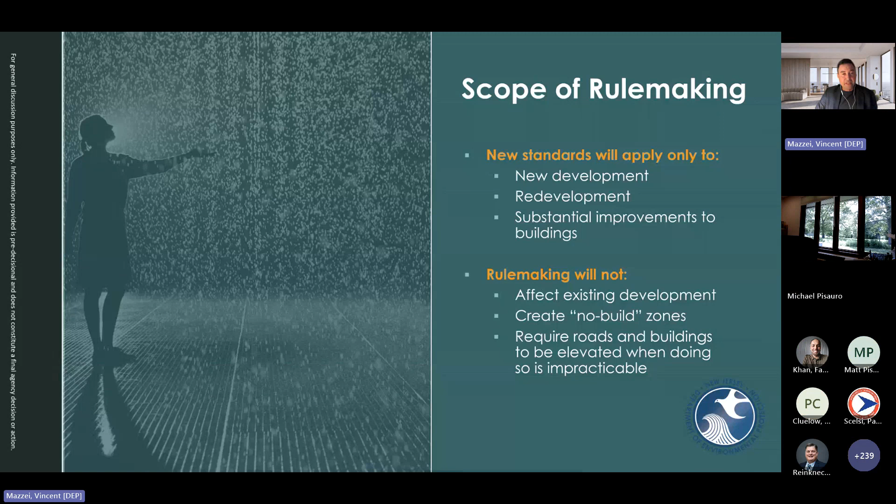The NJPACT real reform is broken up into 7 major themes, and we're going to cover 2 of them today: protecting against chronic inundation, sea level rise, and flood damage, and how our regulatory rubric helps protect critical facilities and infrastructure. Protecting land and water resources we'll cover on Wednesday, stormwater next week, and some other things related to the coastal rules we'll be covering later this week.

So let's talk a little bit about the underlying science. You've probably seen this from prior webinars or publications we've had. This is from the Rutgers University Science and Technical Advisory Panel report in 2019. It sets out the probability or chance that sea level rise will exceed certain heights based on different emissions levels—low, medium, moderate, and high—and different planning horizons: 2030, 50, 70, 2100, and 2150. Our first decision was to decide what planning horizon to use.

We focused on the year 2100 because that's 76, 75 years away after adoption, and roads, buildings, and bridges will likely still be serviceable in some capacity by the year 2100. We want to make sure that what's built today will last and be as safe as possible by the end of the century.

The next thing was we focused on our moderate emissions levels, which is an unknown because many scientists believe we're not going to meet that moderate emissions level due to global impacts. So it could be higher than this, but there's a likely range, assuming moderate emissions, of between 2 and 5.1 feet of sea level rise. Initially, we looked at the median chance and say there's a 50% chance sea level rise will increase by at least 3.3 feet.

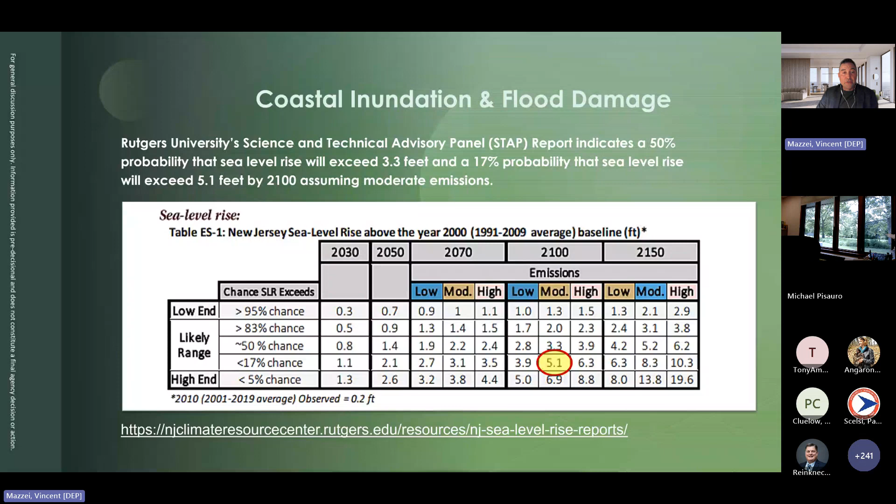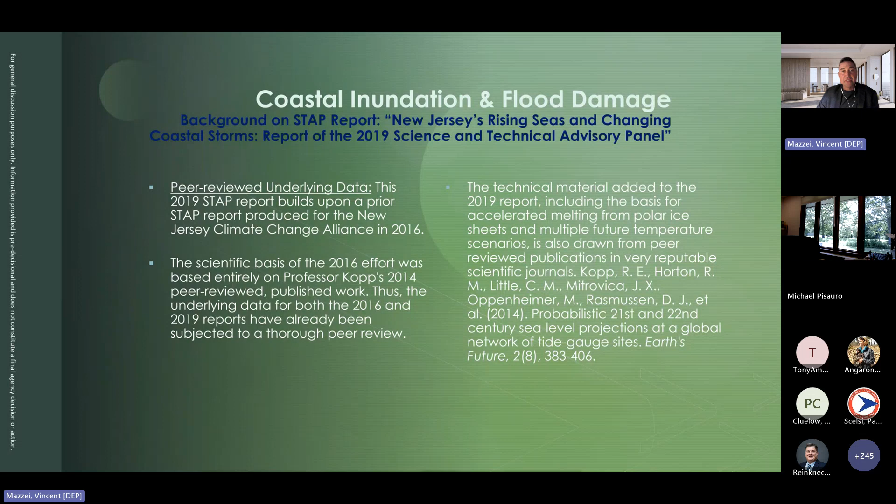The data from the 2019 STAP report builds on the report that came out in 2016 by the New Jersey Climate Change Alliance, which was focused a lot on Professor Kopp's 2014 peer-reviewed published work. So the underlying data from the 2016 and 2019 reports are based on peer-reviewed material. Here's a link and some lists of the material used for the 2019 report, especially regarding the acceleration from the melting of the polar ice caps.

So what does that mean if we have 5 feet of sea level rise by the end of the century? As sea levels rise, more land either regularly or permanently will be inundated. That's depicted by the blue area, which we'll examine more closely. Higher sea level rise means more inundation, and it means higher flood elevations.

If the sea level is going up 5 feet, that means flood elevations are going up by at least 5 feet. Higher flood elevations mean more recurring flood damage further inland. And the problem we face is that our existing flood standards are based on sometimes outdated historical trends that don't account for sea level rise and attendant storm surge.

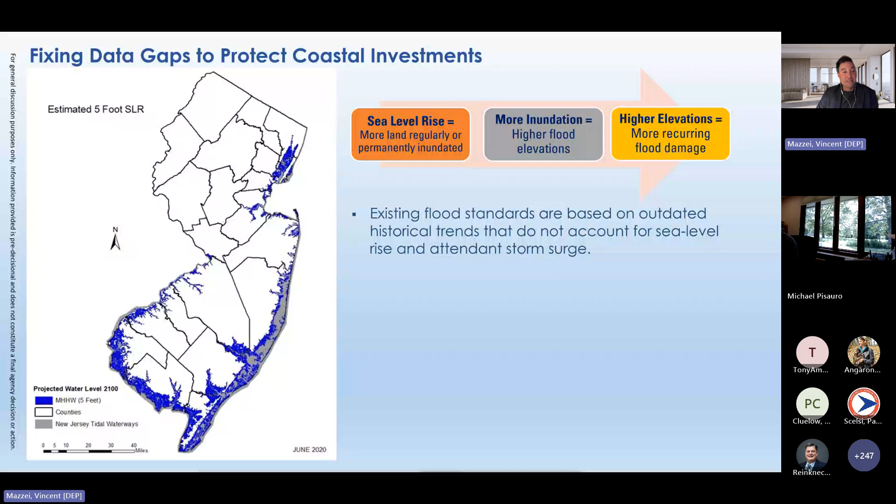So mapping is great, but it's a snapshot in time—it says, based on the data we've collected so far, this is what we expect will happen. But as Katie mentioned, we don't have a climate that is not changing anymore. We can't look at stationarity anymore.

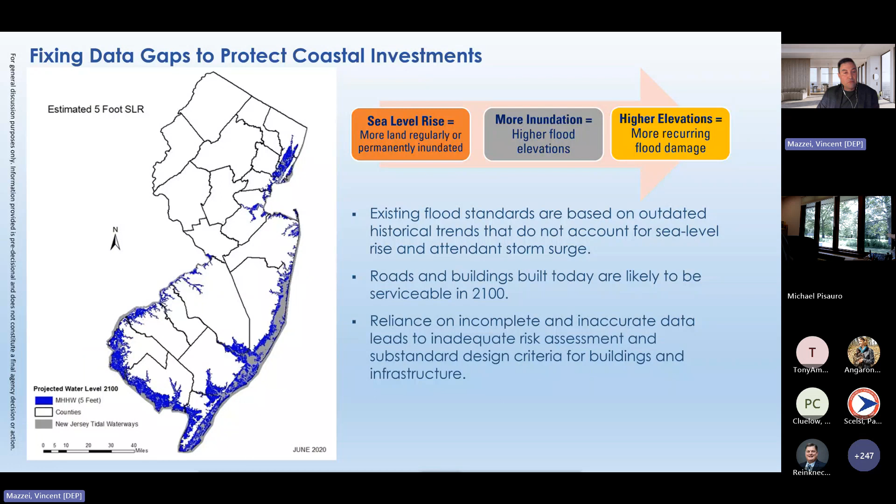So roads and buildings built today are likely to be serviceable in 2100, as I mentioned. And reliance on incomplete or inaccurate data leads to inadequate risk assessment. It leads to increased damage to public infrastructure, greater flood losses, and greater loss of life.

So let's talk about the inundation risk zone and how you figure out where it is. That's the first place to start—where is this area? There are two options, and a lot of things in our regulations are set up this way, where you have an easier option based on mapping or some other source, or the ability to provide better data or more site-specific data for your project.

So the two options are: you can use DEP's online mapping tool, which I'll walk through—that's on our GeoWeb application—or you can compute the actual limit of the inundation risk zone on a site using site-specific topography and data from NOAA, based on the mean higher high water elevation. The method is outlined in the flood hazard rules in section 3.4C.

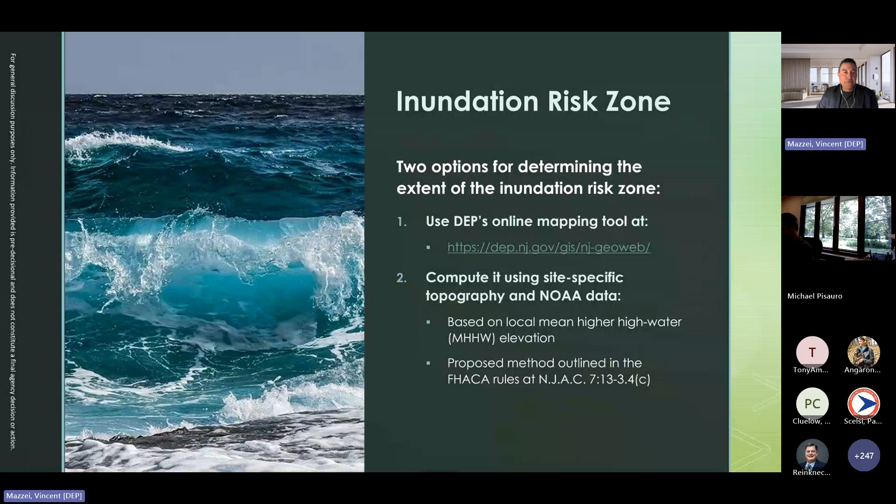So if you look at DEP's GIS system, I have a bunch of screenshots that will show you how to figure out where the inundation risk zone would be in different places. So you open up the tool based on that link and launch GeoWeb, and you get a map of New Jersey.

In the top left corner, you can add in an address, or you can just zoom in. I zoomed in to an area around Highlands by Sandy Hook. The next thing I did was open up the base maps, and I like to use imagery. So here's the imagery of that area—this is aerial imagery.

And then in the top right corner, you can see the layers. And if you expand that down, you can see that there's one layer for water. And if you expand that, you have a whole suite of information that you can apply to a given area.

One of those things near the bottom you can see is sea level rise. Not only is there 5 feet, but you can see 3 feet and 2 feet as well, because it's a useful tool for people and communities to look at how resilient their communities are, figuring out what areas are most vulnerable to sea level rise.

So if you click on, in this case, the 5 feet of sea level rise, everything that's in blue or light blue or almost white is underwater if you have a 5 foot sea level rise. You can see Highlands there, the town in this upper area, is almost completely underwater. That means all the time, or twice a day during high tide.

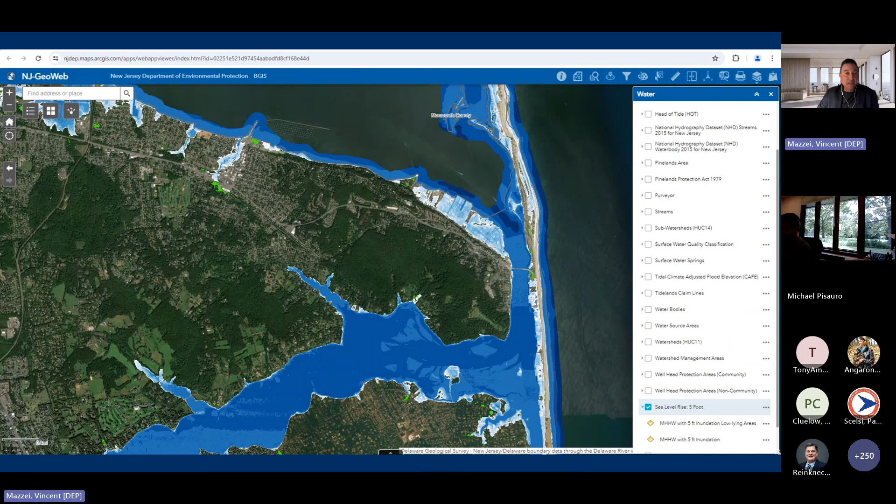I've broken this up into 7 sections because I know there'll be a lot of questions on each. I want to take a minute or two to see if anyone has any questions based on what we've covered so far. You can either raise your hand or just unmute yourself and ask a question. You'll have time later to ask questions if you haven't thought of one yet.

Yes, Ray. Ray, I think you had your hand up. And I think you're muted, sir. Sorry, I didn't know that you called me.

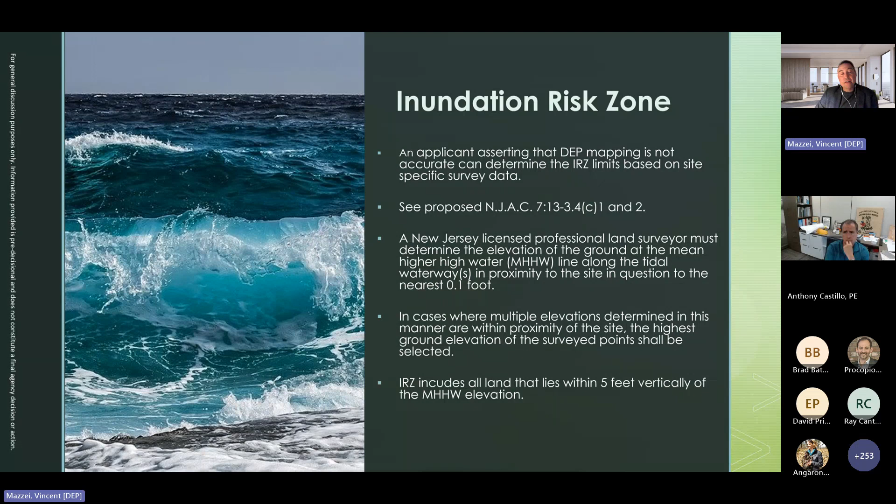And if you take the average over a long period of time of the higher of the two, you have the mean higher high water elevation. And so that is a good picture of what would be inundated during high tide in most cases.

So if you look at a cross section of a seascape, you have your current sea level and your current shoreline. And if you add 5 feet to it, you can see that the land in between the current shoreline and the future shoreline is what we're calling the inundation risk zone.

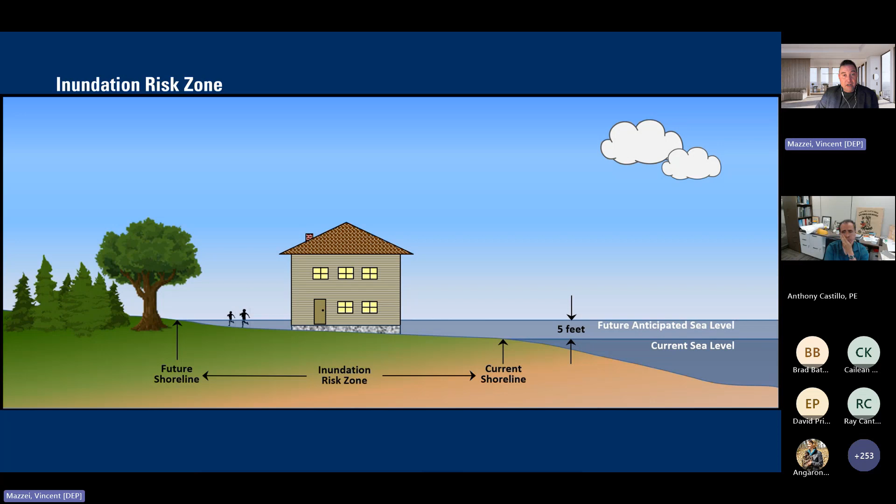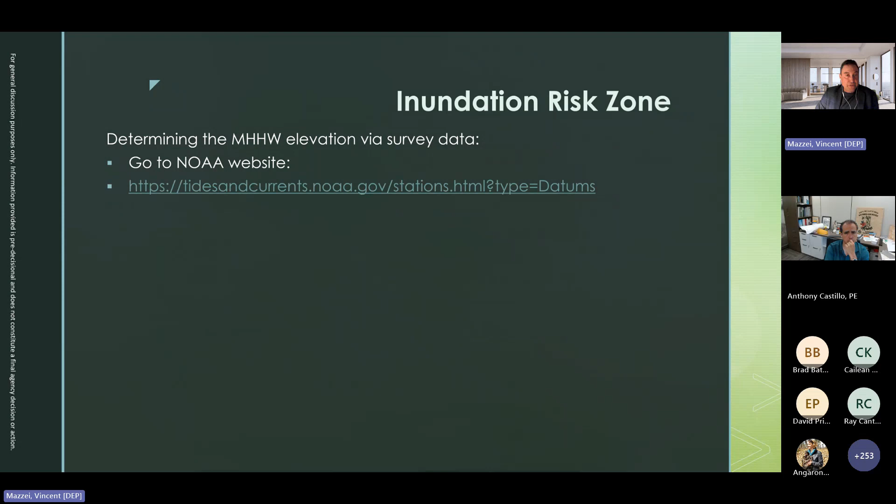And if you were to compute that based on the current sea level, this is how you would do it. You'd go to the NOAA website, here's the link to it, and there are different datums that you can see from all different stations across the state.

So if you click on New Jersey, there's a list of all the states, and you click on New Jersey, you'll see that there's about 84 different stations along our coastal areas. And you might even be able to use some of them in Pennsylvania or New York, depending on where you are.

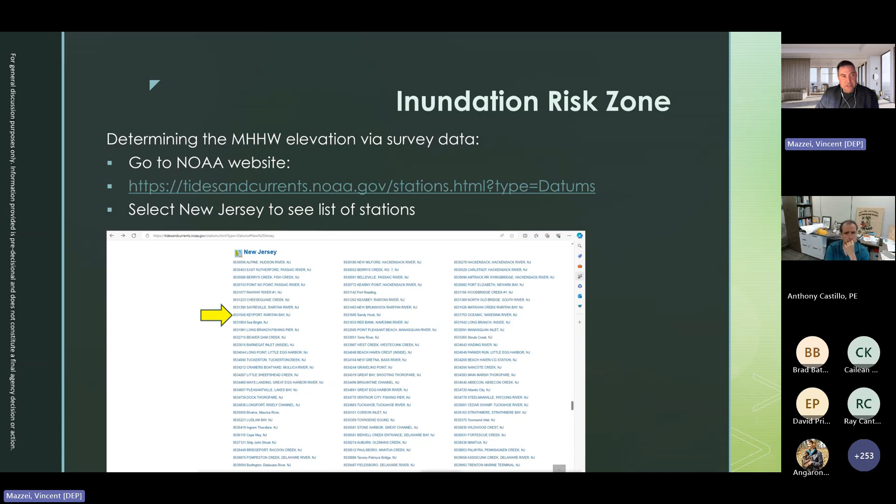So for conversation purposes, I just picked the Keyport station along Raritan Bay. And if you click on that, you can see this gives you some very specific data for this location.

And the default of all the elevations that are given is based on mean lower low water, which is the exact opposite of mean high water, right? And so what you need to do is convert the datum into NAVD 88.

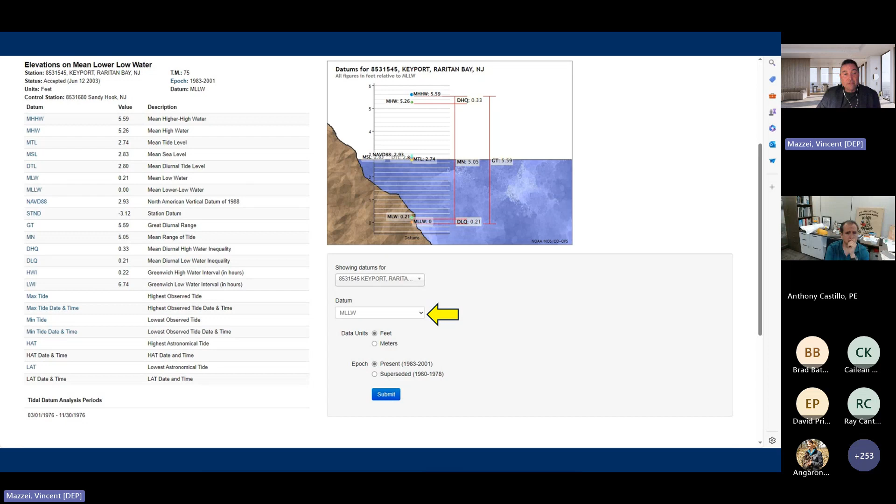So if you scroll down, you can see here that you can choose what datum. The default is mean lower low water, and you can pick feet or meters or whatever. So if you drop that down, you can pick NAVD 88, North American Vertical Datum of 1988, which is what we use. And then click submit, and it changes the numbers.

So you can see that at the very top, the mean higher high water line is at elevation 2.66. So that becomes your benchmark for determining the IRZ.

So in this case, if the mean higher high water line is 2.66, you add 5 feet to that, and the elevation of the inundation risk zone is 7.66. So any land on this property that's below elevation 7.66 would be in this inundation risk zone.

So any questions about that methodology before we go into what the implications are? Mr. Loomis.

How does that work with levees? How does that work with, in other words, if water can't get behind the levee?

Is that what you mean? Right. I see. Well, on those maps, it shows the low areas of inundation on the back, on GeoWeb. It shows green areas, which I guess are lowland areas that wouldn't be able to drain right if there's 5 feet of water.

So does that create a special flood area for those spaces? If a levee prevented the water from getting into the area, then it wouldn't be part of the inundation risk zone. But if the levee's overtopped, which is a lot of times what it would be, maybe not for the inundation risk zone purposes, but for flood elevation purposes, then the area behind the levee would still be considered regulatory. So it really kind of depends on the circumstances of the site to figure out whether or not it would be in or not.

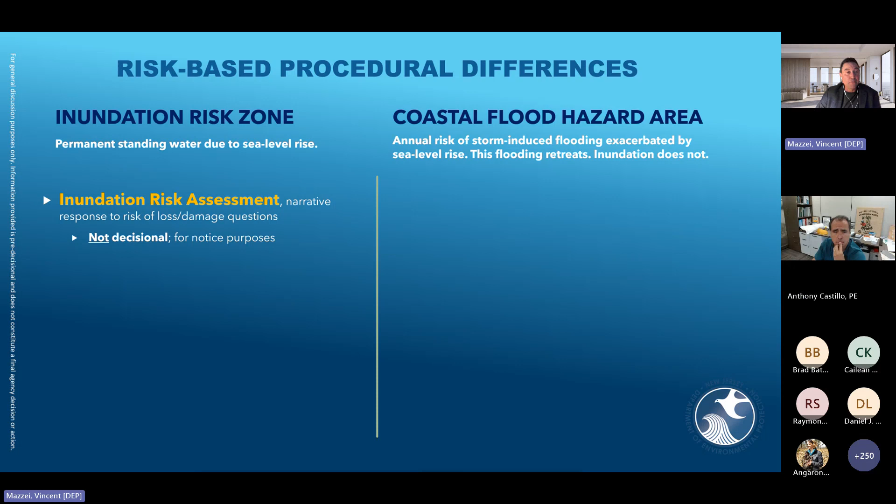The second is an on-site alternatives analysis. Has there been an effort to examine all opportunities to ameliorate flood risk and inundation risk on this site? Is the development on the highest portion of the site? Maybe some portions of the site can be raised up, and so on. The standards in the inundation risk zone that we're proposing only apply to residential buildings, critical buildings, and critical infrastructure.

And then there's an acknowledgement that there is a flood risk on this site. So when we issue a permit for development in this area, we would have a statement saying that this land has been identified by the state of New Jersey as being at risk of inundation, that it's in the inundation risk zone. That way lenders, future purchasers, and future occupiers of the structure can understand what the risks are, because the more well-informed folks are about their flood risk or risk of inundation, the better choices they can make.

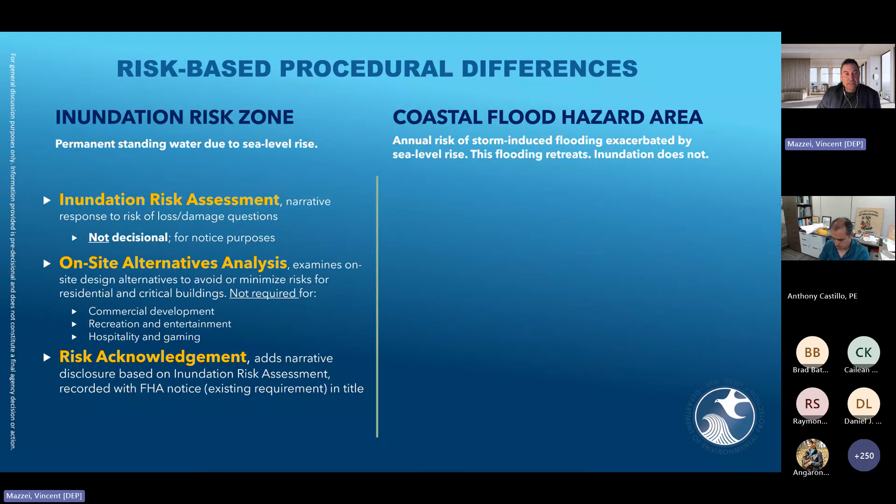Now let's contrast that with the larger coastal flood hazard areas. There's no inundation risk assessment or alternatives analysis per se, unless the rules already require it, and we'll talk about that a bit. There still is a risk acknowledgement, but it's a shorter form of it. It's recorded in the title, and the flood hazard rules already have language related to that, and it's going to be expanded as part of this rulemaking.

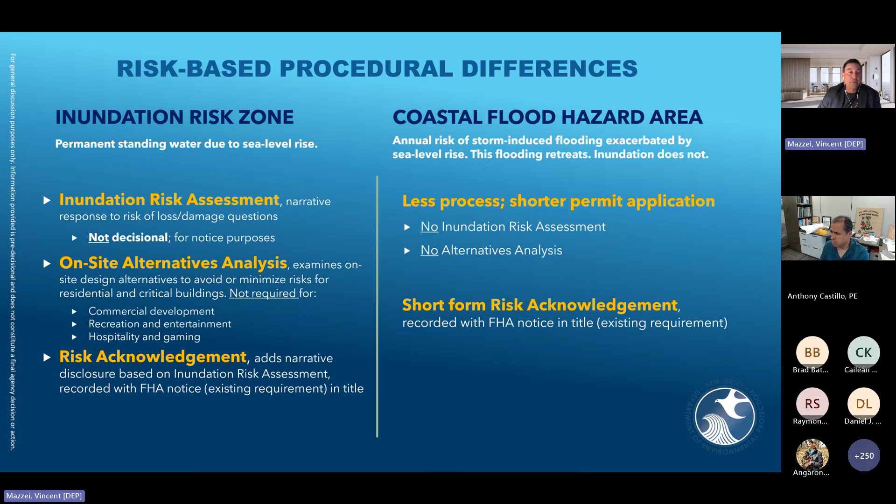So the new standards apply to new, reconstructed, or improved residential buildings. There's an exception for the inundation risk zone standards for repair and maintenance activities that don't alter the building's height, footprint area, or habitable area. The reason is that we recognize there are different types of substantial improvements. A substantial improvement to a $1 million building means you could do $500,000 worth of improvements before triggering substantial improvement. If you have a $60,000 building, you could do $30,000 of improvements and trigger it. So if you were doing just basic maintenance and repair, like replacing your roof, kitchen, or bathroom, you could easily hit that $30,000 mark.

So our idea was that if someone were doing activities in the inundation risk zone intended to either construct something new or expand an existing use, then that's when this would kick in. If you have an activity that doesn't alter the building's height, footprint area, or habitable area, then these standards just don't apply to that.

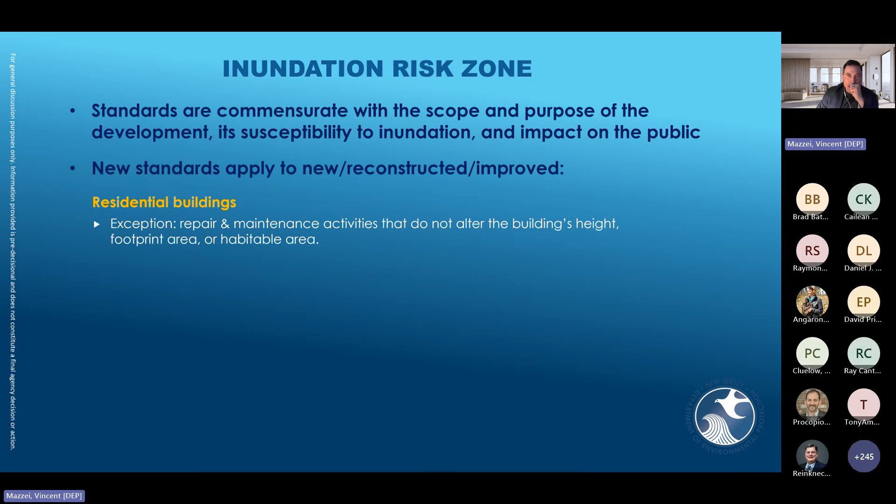Critical buildings, that's ASCE flood design class 3 and 4 buildings. That includes everything from schools, fire and police stations, medical facilities, correctional facilities, power generating stations, critical aviation facilities - basically anything where people will be congregated and maybe trapped during a flood, or which types of buildings are critical for a community's recovery after a flood.

So police and fire stations, evacuation routes, things like that. Critical infrastructure is that infrastructure that's necessary for emergency response and recovery during and after a flood, so it's similar to the critical buildings. The standards in the inundation risk zone only apply to these three categories.

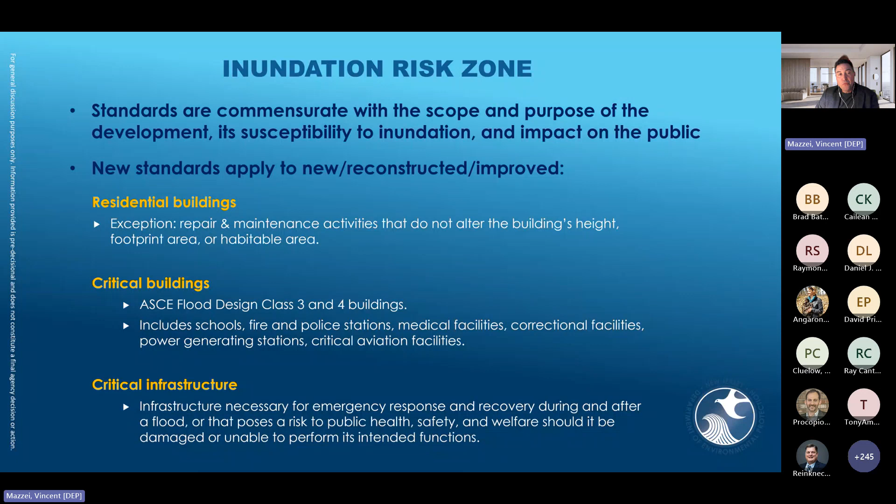There's an exception with roadways for drainage improvements and associated stormwater management structures necessary to ameliorate periodic inundation along a roadway. So if a municipality is just putting in some drainage, putting in some new inlets or something like that, there's no opportunity now to raise or improve the road - that would be an exception.

Safety or state of good repair improvements to roadways, same thing. And any project proposed by a public transportation entity - any government entity, the Turnpike, or New Jersey Transit - that reached a milestone as to development and design prior to the adoption date. If you look at the current regulations we adopted last year, you'll see language that says when a public transportation entity reaches that milestone, it locks them into the rules in place at that time.

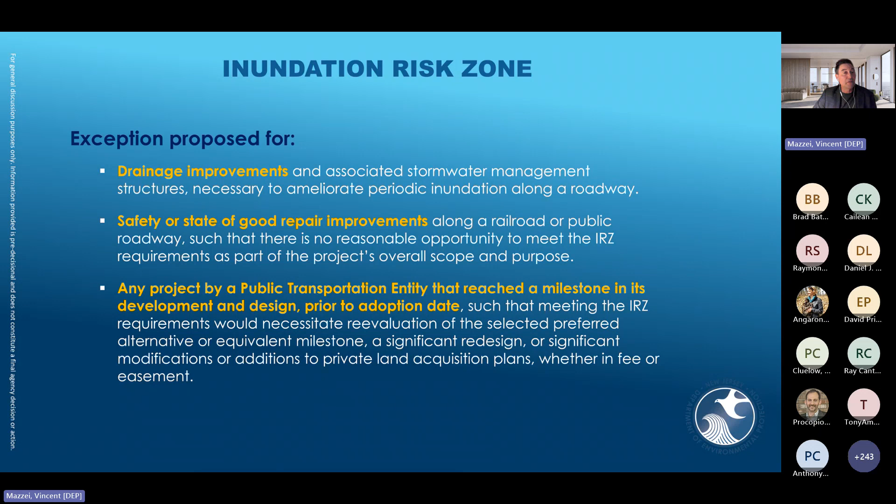So, a deeper dive - what do applicants in the inundation risk zone need to show us? First, we need a good picture of how serious the permanent or daily inundation is. We need to know the mean higher high water elevation nearest the site, the minimum amount of inundation that would cause the lowest portions of the site to be inundated. Are we talking 6 inches? Are we talking 5 feet?

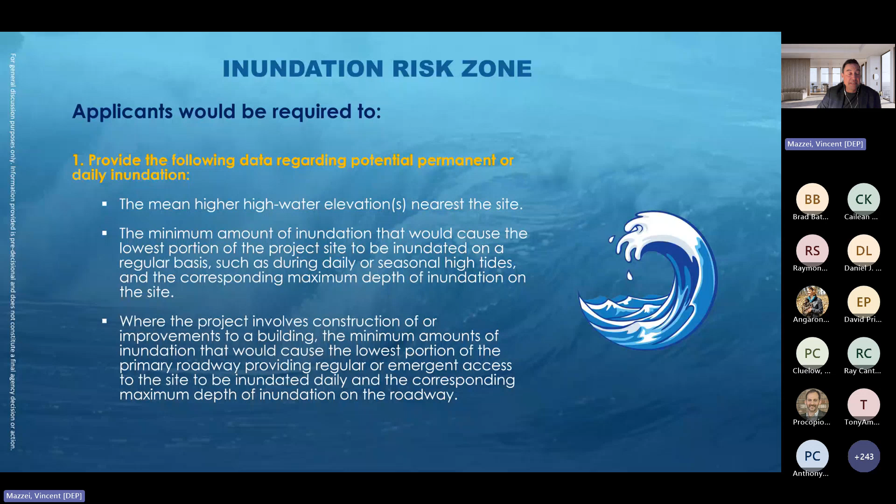Where the project involves construction or improvements to a building, we also need the minimum amount of inundation that would cause the lowest portion of the roadway providing access to the site to be inundated. So you could have a building that's just marginally in the inundation risk zone, but the road going to that building is several feet below that, which is not uncommon. You would have to disclose that information.

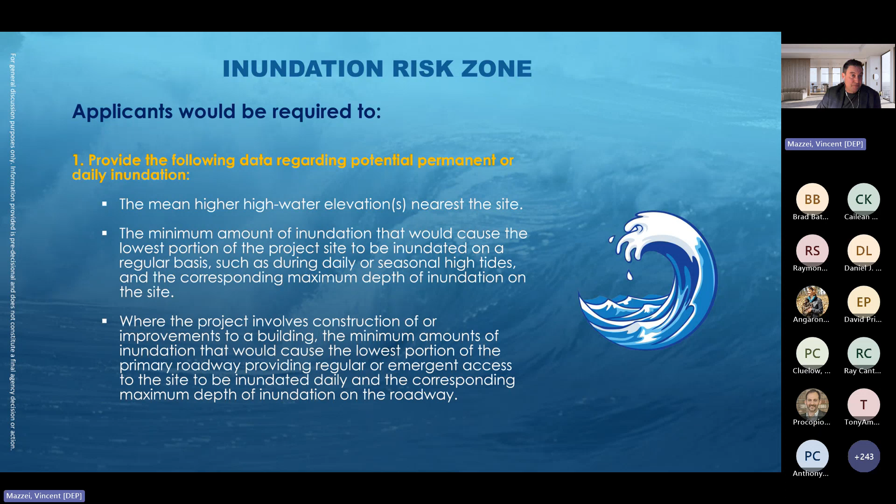The second thing is you'd prepare an inundation risk assessment that analyzes the potential adverse impacts of inundation on the site. Now that we know how much water, what's going to happen when that water hits? What kind of injury or loss of life is anticipated? If you have 6 inches of inundation, perhaps you can raise the ground 6 inches and address it that way. If it's 5 feet, you're not going to be able to do that in a lot of cases.

What kind of damage or loss of use of the building or infrastructure due to inundation might occur, including disruption of public transportation or government services? It's basically an idea of what's going to happen when this thing is underwater, and what are the increases in short and long-term costs due to inundation.

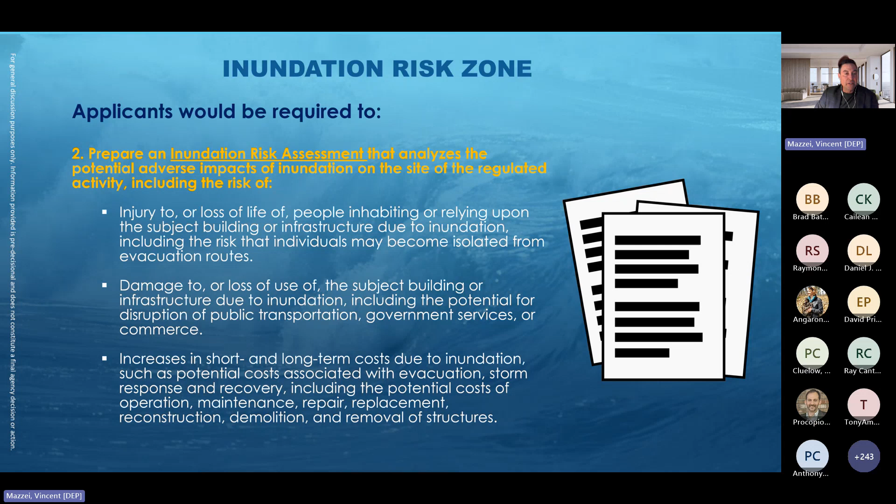A lot of this exercise is to make sure people understand what they're getting involved with if they're developing in this area. We did a GIS exercise of the inundation risk zone, and about 94% of the land in the zone was either already developed or encumbered by something that would make development difficult, like coastal wetlands or other encumbrances. So what we generally believe we'll see in the inundation risk zone is redevelopment activities, and there's generally going to be an opportunity to ameliorate some of the inundation damage that could happen.

The third thing is to demonstrate the use of all reasonable measures for accomplishing the basic purpose of the project in a manner likely to avoid or substantially reduce potential adverse impacts on public health, safety, welfare, and the environment. Are there any on-site alterations of topography that would help? Are there different configurations of the plan on site that would ameliorate flood or inundation risk? And if it's a building designated flood design class 4 - the highest level, like nuclear power plants - we want investigation not just on site but even off site in the community to see if there's a better place for it.

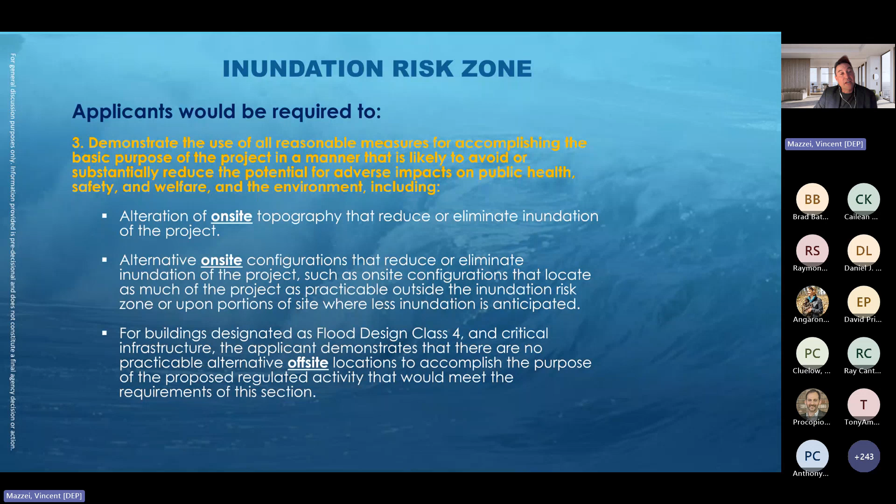Now, if there's a hospital on a barrier island and it needs to be on the barrier island, then there's no other place it can go. But maybe there's a site that has less risk than another site. That's the kind of interaction and interchange that we'll have with applicants.

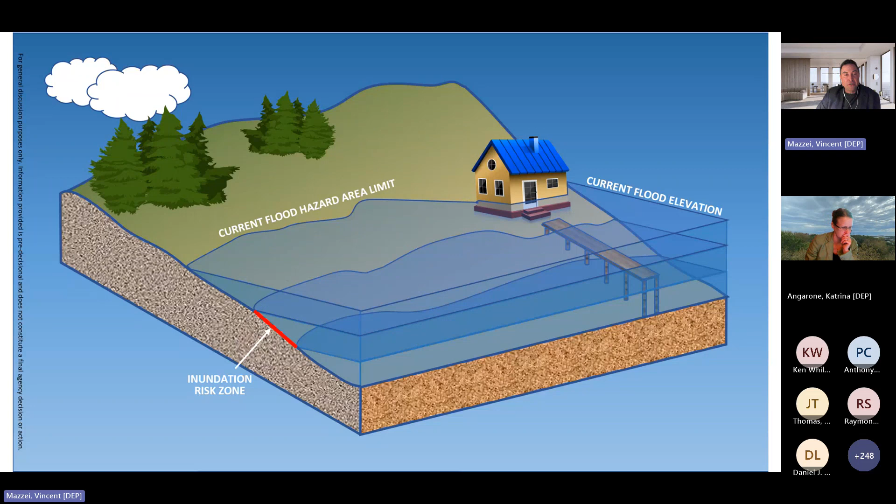Current sea level, mean high water line, as we mentioned, that's your current shoreline. If you add 5 feet to that, you get your future shoreline. That land in between is the inundation risk zone. And you have your current flood hazard area limit. But if you're adding 5 feet to your baseline, to mean high water line, then your flood elevation is going to go up by at least 5 feet. So what does that look like?

Currently, we estimated that about 16% of New Jersey lies in a FEMA mapped floodplain, and part of that's tidal and part of that's fluvial. In the coastal zone, our regulatory flood under the existing rules is equal to FEMA's 100-year flood elevation, the 1% or the BFE. When we use flood elevations in the flood hazard rules or the coastal zone management rules, we always use the higher of the effective map or any newer preliminary or proposed map. If the effective map is 10 and a newer preliminary map is 11, we're using 11. That would become what we consider the regulatory flood. And we have 1 foot of freeboard added for roads and buildings on top of that. So it would be BFE plus 1 would be the lowest floor of buildings, for example.

Proposed, we estimate that by raising the flood elevation 5 feet and expanding it inland to reflect what sea level rise would do to the floodplain, that would add about 1.5% more of New Jersey's land area into the regulatory floodplain. So 16% becomes 17.5%. And that new coastal flood elevation would be equal to FEMA's BFE, effective or preliminary, plus 5, and then again plus 1 foot of freeboard.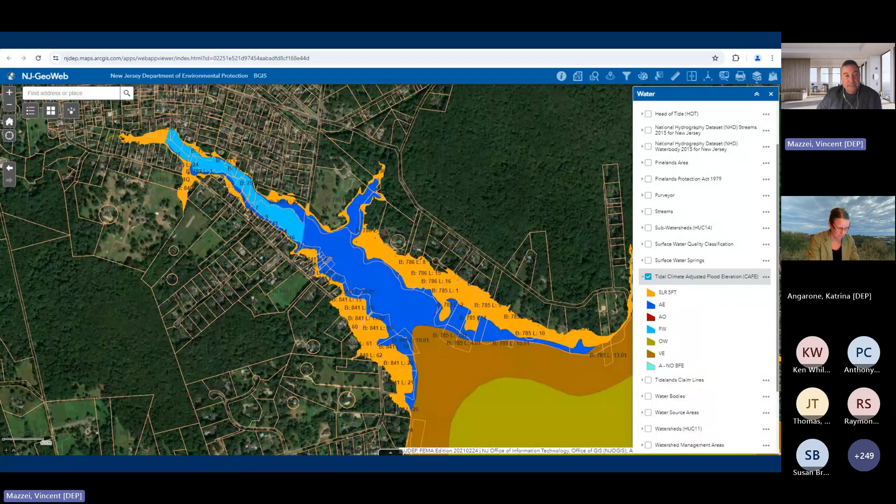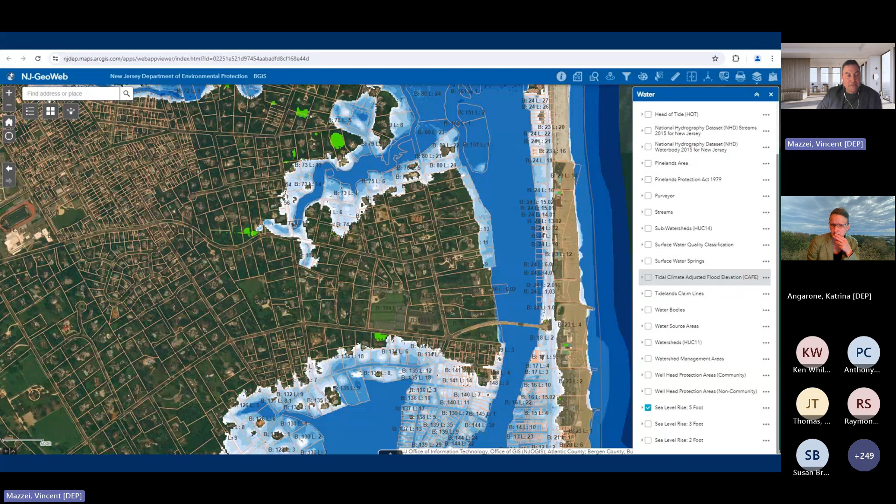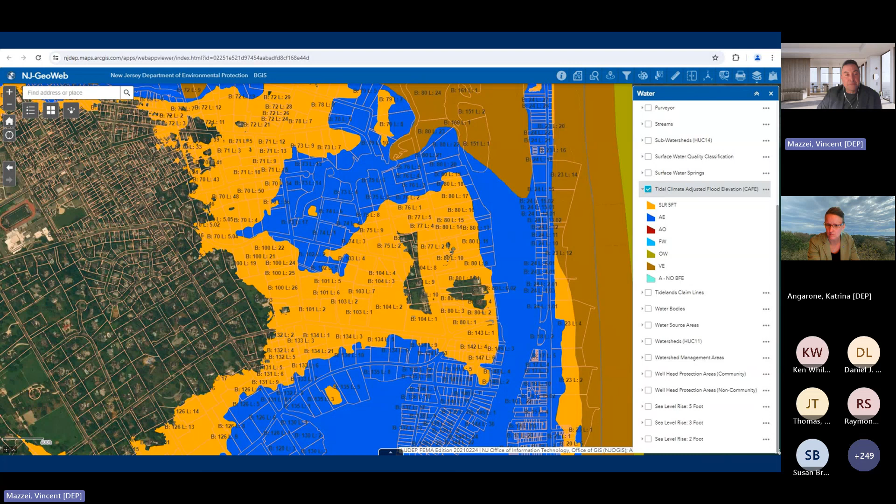This is probably even a better example. This is down by Sea Bright again, and you can see this is the sea level rise, just as a kind of a benchmark, and then this is what adding 5 feet to the flood elevation looks like. So FEMA mapped areas, AE zone, that's the blue. The orange that's next to it is what would be added if you add 5 feet to the flood elevation. So any questions on what that looks like?

Actually, I'm going to take that back. I'm going to skip this question and go to the next one because that was such a short session, and I want to try to move on and talk about some of the implications because I think it's going to answer some of the folks' questions.

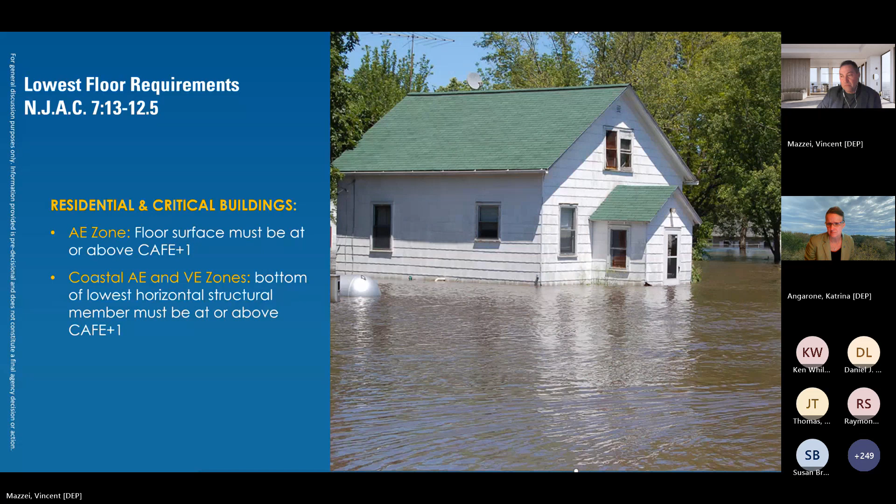So the lowest floor requirements obviously are affected by this. For residential and critical buildings, the floor surface has to be at CAFE plus 1. So if your flood elevation, if your effective is 10 and your preliminary is 11, then that means your design flood is 11 plus 5. The CAFE is 16, and that means the lowest floor would have to be at 17. If you're in a coastal AE or V zone, then the bottom of the lowest horizontal structural member has to be at or above 1 foot above the climate adjusted flood elevation. And there's some flexibility for certain AE structures in the coastal AE zone.

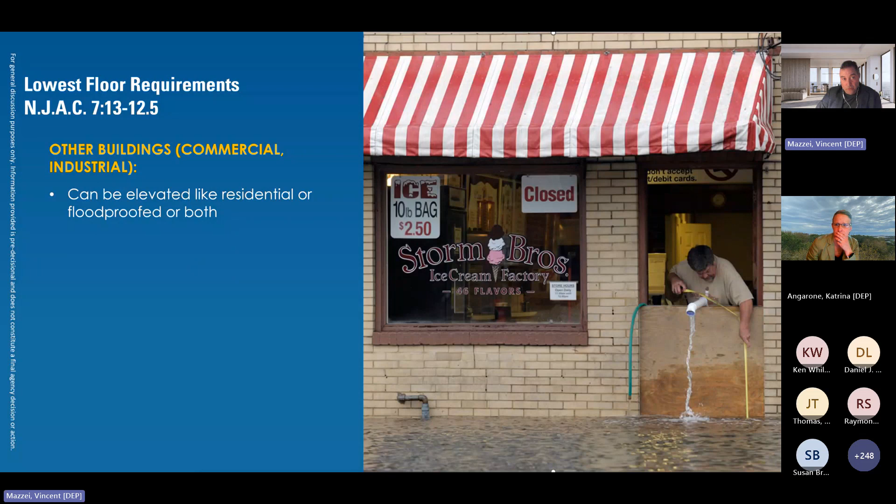So other buildings, commercial, industrial, things that aren't residential or critical, they can be elevated or floodproofed or both. And usually it's going to be some kind of combination.

This is not how you dry floodproof a building. Habitable areas have to be dry floodproofed, and this is not a good example of that. I want to point out that the name of the store is Storm Brothers. I don't know if that has anything to do with what happened there.

Dry floodproofed areas are designed to keep water out of the building. Enclosed areas below the lowest floor can be wet floodproofed, like a crawl space with flood vents. Again, you're not going to be able to have enclosures in a V zone.

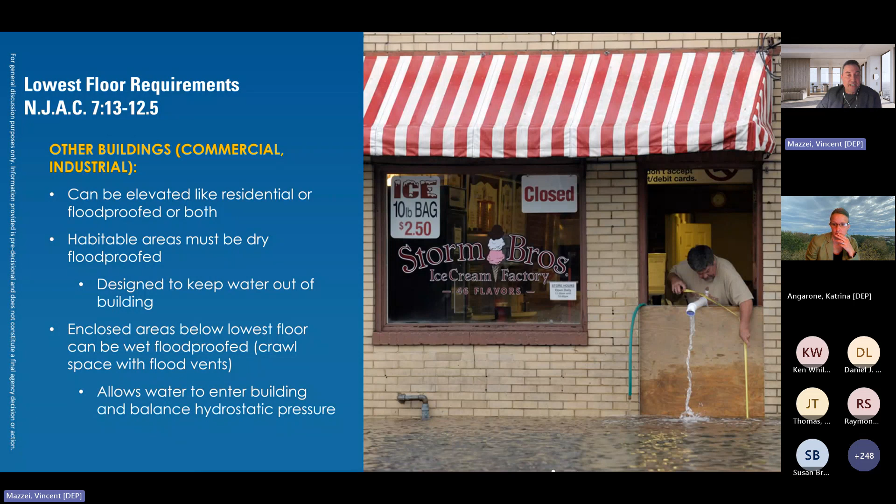The idea is to allow water to enter the building and balance hydrostatic pressure. So I don't recommend elevating a house in this manner. I don't know that the structure will be able to handle the lateral loads, but you can see what an elevated structure looks like.

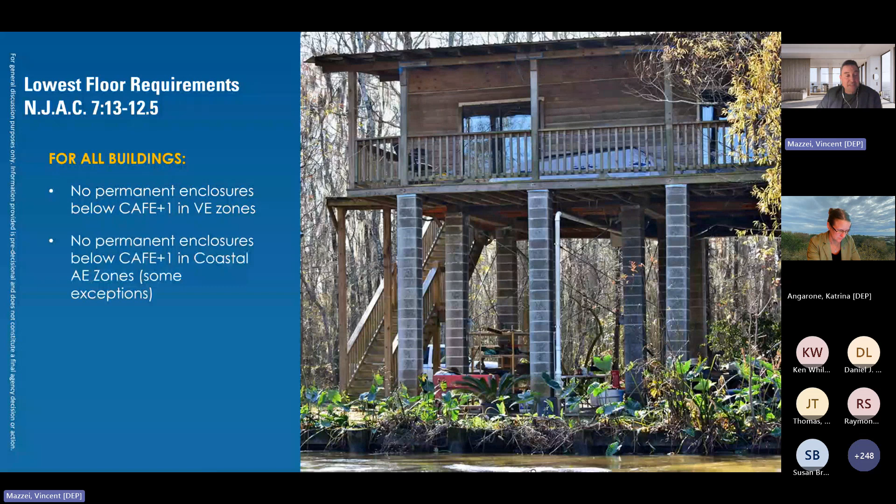For all buildings, no permanent enclosures below CAFE plus 1 in VE zones. Some exceptions, but the same thing applies in coastal A zones, because of that wave action. Habitable areas cannot be wet floodproofed, they have to be dry floodproofed.

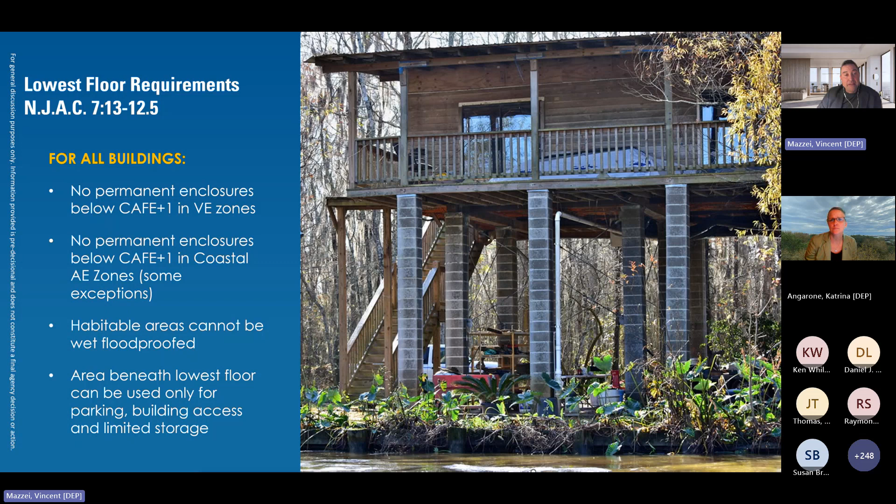So we can't have situations where the water's coming into areas where people are residing. And the area beneath the lowest floor can only be used for parking, building access, and limited storage.

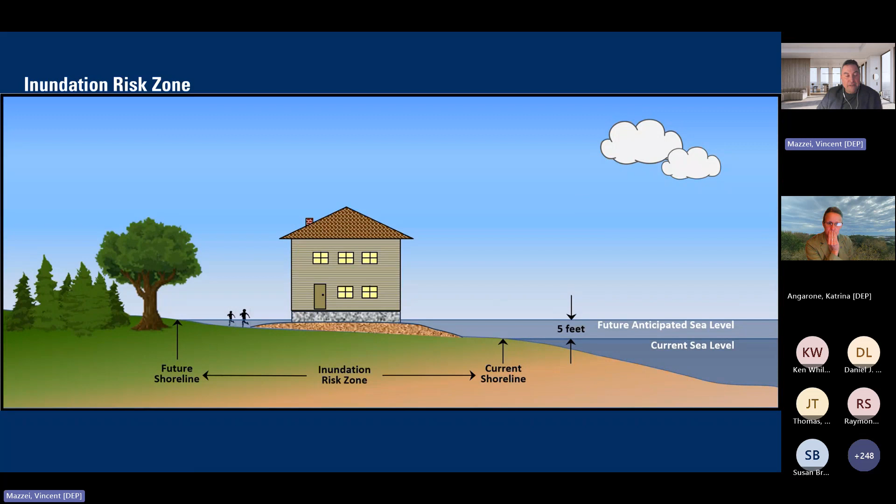So what does this look like for a particular project? Here's your inundation risk zone, and here's your 5 feet of anticipated sea level rise. If that's all we had to contend with, maybe the property looks like this, raising up the ground a little bit, putting the building on a crawl space, and we're good. But we don't have only that to contend with.

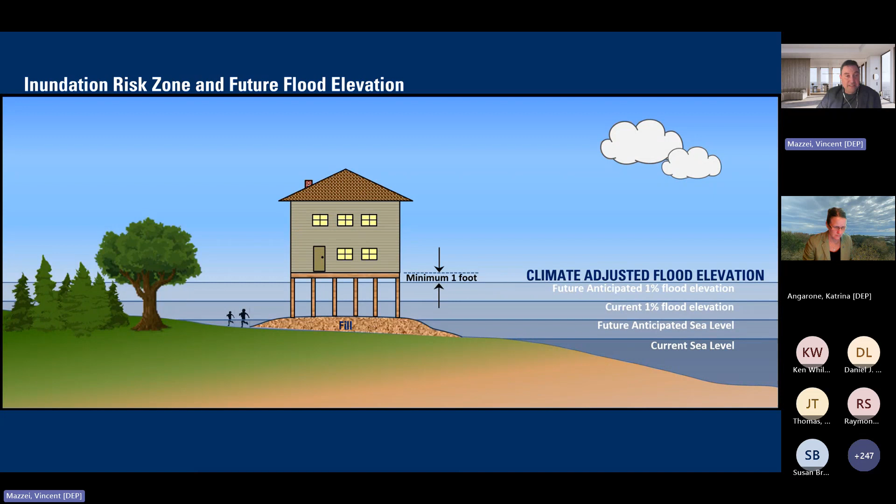We have the flood elevations to contend with: your current 1% flood elevation, or 100-year flood elevation, and your future 100-year flood elevation, which is 5 feet higher. So if this structure were being built today, it would have to be 1 foot above the climate adjusted flood elevation. As I mentioned before, in this case, let's say this is in an AE zone, the walking surface of the floor would have to be at least 1 foot above that climate adjusted flood elevation.

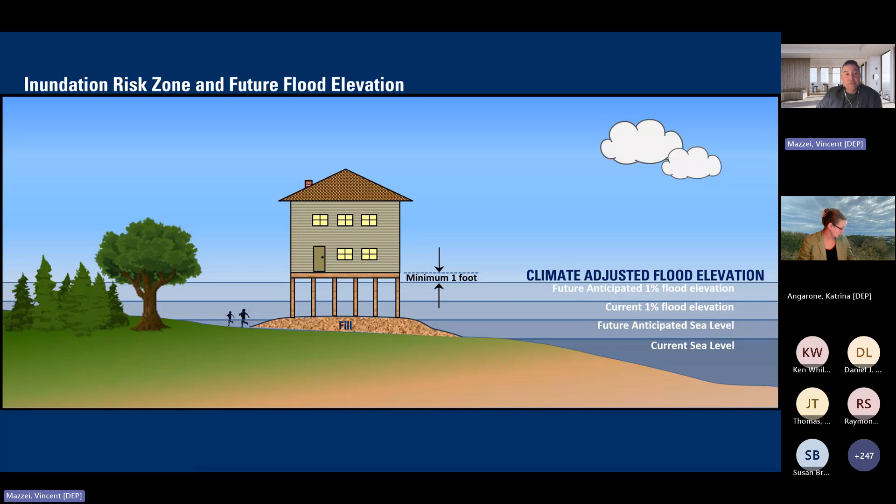Now, not necessarily hard to do if you're building new, especially if it's a single family home or duplex. It's not going to be the case if it's something like a commercial building, and I'll show you an example. Now, granted, I want to point out that this fill is very close to current sea level, so I don't know that you'd be able to do something like this, but I can only fit so much on the drawing. So let's say that you're putting in a convenience store.

You're not going to be able maybe to elevate that convenience store to be 1 foot above the climate adjusted flood elevation. So you might have a combination of dry floodproofing for the area where people are going to be using the store, and wet floodproofing below it. The dry floodproofing would have to go up to 1 foot above the climate adjusted flood elevation.

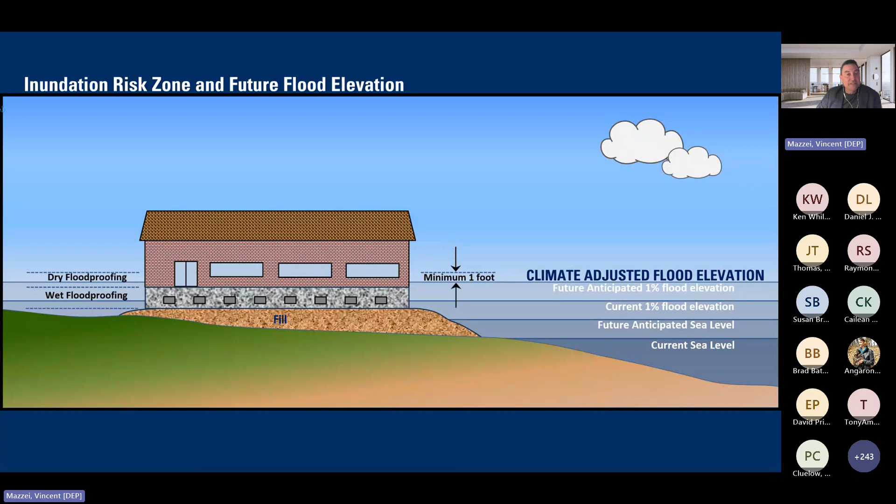So you might have a situation where the climate adjusted flood elevation is, say, 16. That means it has to be floodproofed up to 17. Maybe the floor's at 14, so you have 3 feet of dry floodproofed area, which is generally doable. And then the area below can maybe be a crawl space.

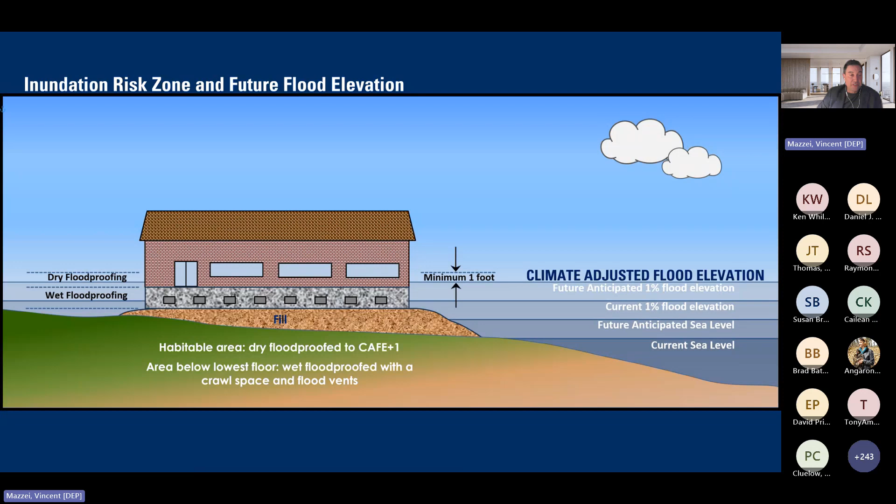Now, it's not going to be the same if you have something like a warehouse where it's going to be on slab, that's another scenario. And you're also going to have situations where you're not going to be able to have a building like this, because how are people going to be able to get in the door? So we recognize that there's going to have to be grading on a site to get to the building.

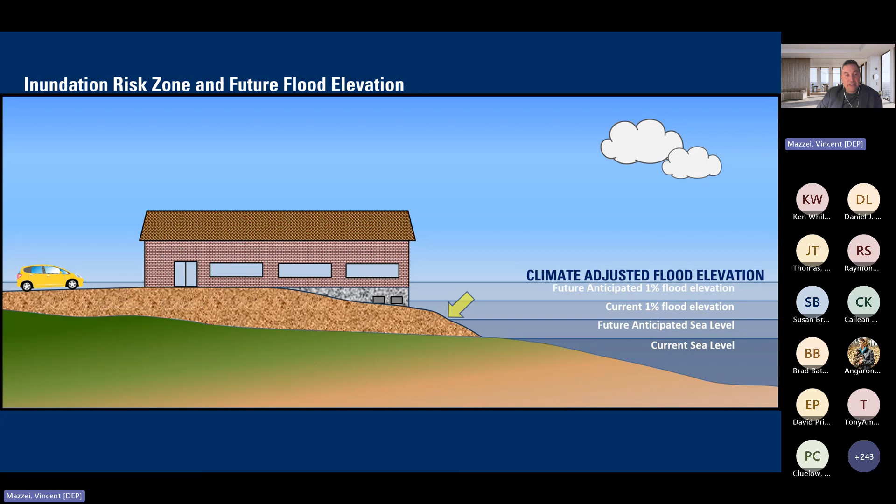And it is very important, as was mentioned earlier by Susan's question, that we want to make sure that any kind of on-site grading does not adversely impact off-site properties. Now, one thing I want to point out here is you can see there's a lot of fill here. And what we don't want to happen is for seawalls to be built all along our coast.

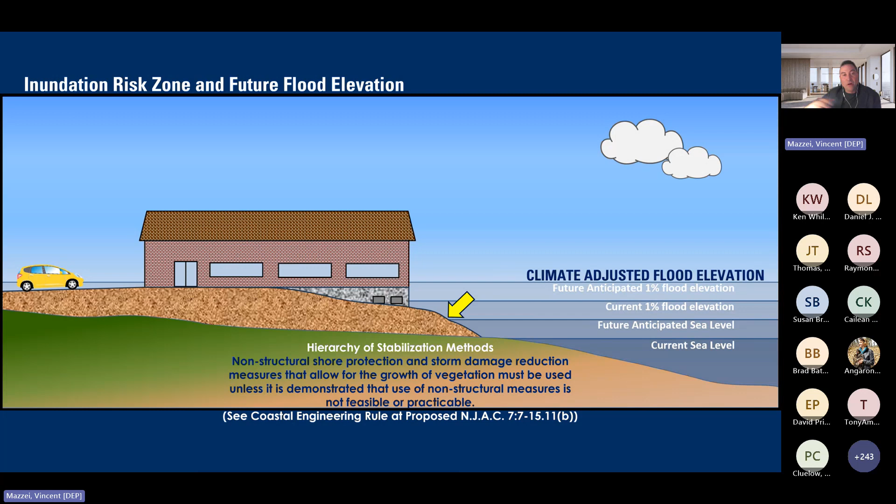If you look at the coastal engineering rule we're proposing to amend in the CZM rules, you can see there's a hierarchy of stabilization methods. Non-structural shore protection and storm damage reduction measures that allow for growth of vegetation must be used unless you can demonstrate that non-structural methods are not feasible or practicable. The idea is to use a combination of rock, vegetation, and things that are more resilient and able to absorb energy, instead of just having a seawall that reflects wave energy and causes greater erosion. Any questions from that session?

Let's see, I missed Mayor Wilden. I don't know if your hand is up from your prior time, or if you had another question. No, Vince, my hand. Okay.

Kaylin, I'm just curious how this might work in a more urban environment where things are built out, but say we wanted to redevelop a property, or theoretically, say in the urban area of Atlantic City, how would this work where it wouldn't kill street life or continuity of a street? Because you can't exactly elevate everything and make a dead street, right? So I'm curious, have you guys thought about that and what kind of solutions you could come up with for that?

Yes, certainly. This is designed to increase the resilience of communities and not intended to prevent redevelopment activities from happening. There are so many different permutations of what that looks like. You can have situations where you're not that deep into it, and by a combination of different flood proofing measures and maybe raising up the ground a bit, you can achieve that.

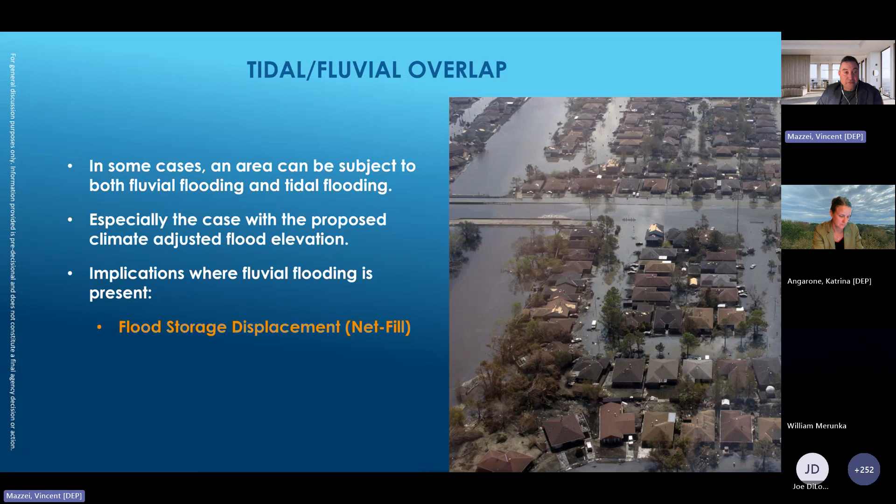So one of the things that's going to happen, because the inland flood protection rule added 3 feet to FEMA's elevation, and we're adding 5 feet along the coast, there's going to be areas where tidal and fluvial floodplains are overlapping. There are implications for how you deal with net fill, flood storage displacement, and dry access, so I'm going to talk about that a little bit.

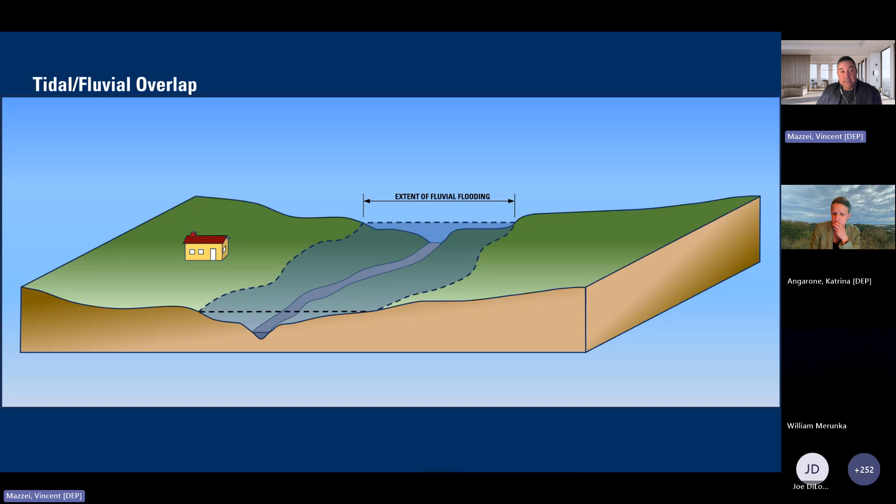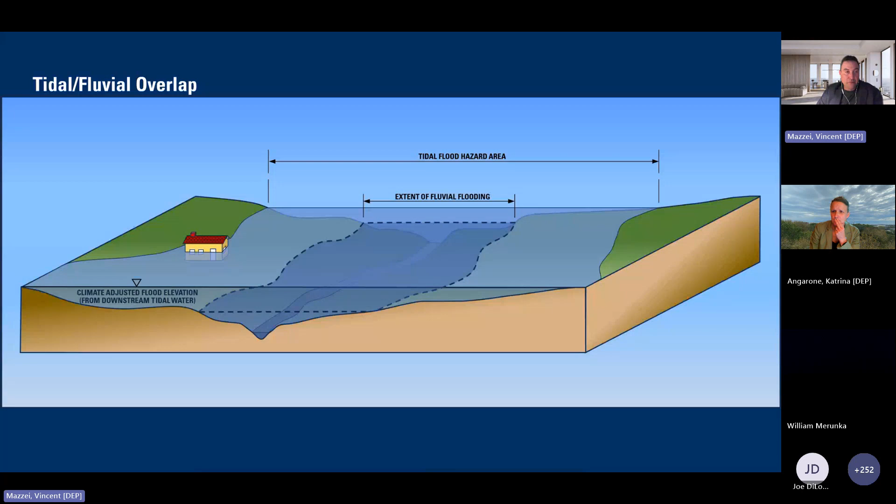So what do I mean by the tidal fluvial overlap? Let's say you've got a property with a stream, so it's going to have its own floodplain driven by stormwater runoff, not by the ocean. But on top of that, you might have backwater from the bay inundating the whole site, so you have a fluvial floodplain inside the tidal floodplain, and that can be complicated to figure out.

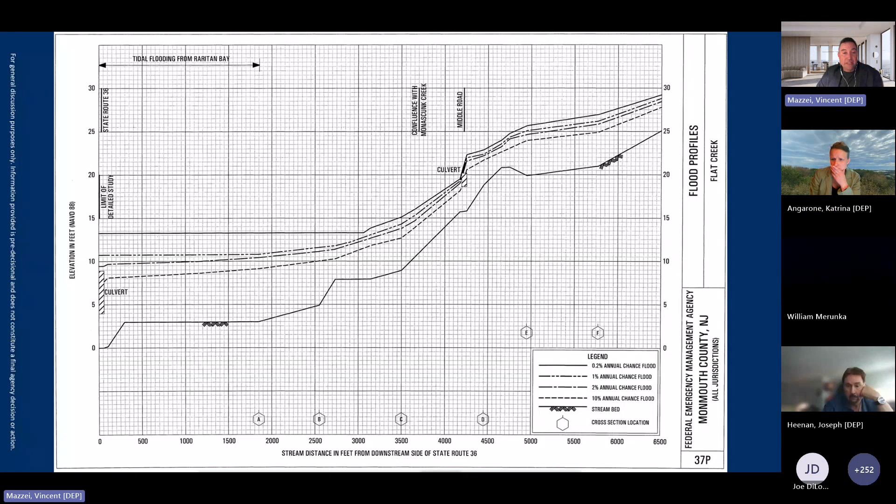Here's a profile of Flat Creek in Monmouth County that shows, among other things, the 1% annual chance flood. In this profile, you can see the different elevations and the area that's tidally influenced from the Raritan Bay. It comes to that point, and you can see the flood elevation is flat up until that point for the 100-year, and then it goes up from there.

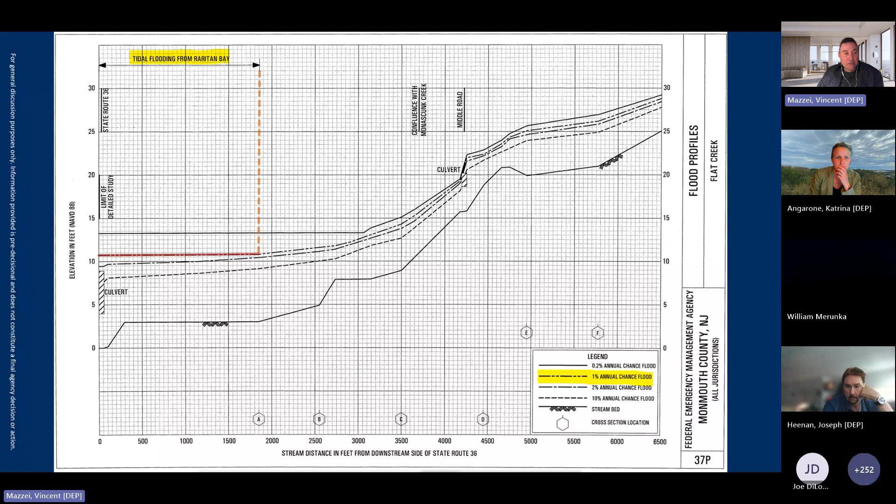So here is your tidal BFE, and here's your fluvial BFE. We're adding 5 feet to the tidal and 3 feet to the fluvial. You have this interesting area right at the confluence of the two, where it's not just going to drop down like that. You would extend that flood elevation back until it meets the FEMA +3 in the non-tidal area. So that becomes an area of tidal fluvial overlap, and your climate adjusted flood elevation is the higher of those.

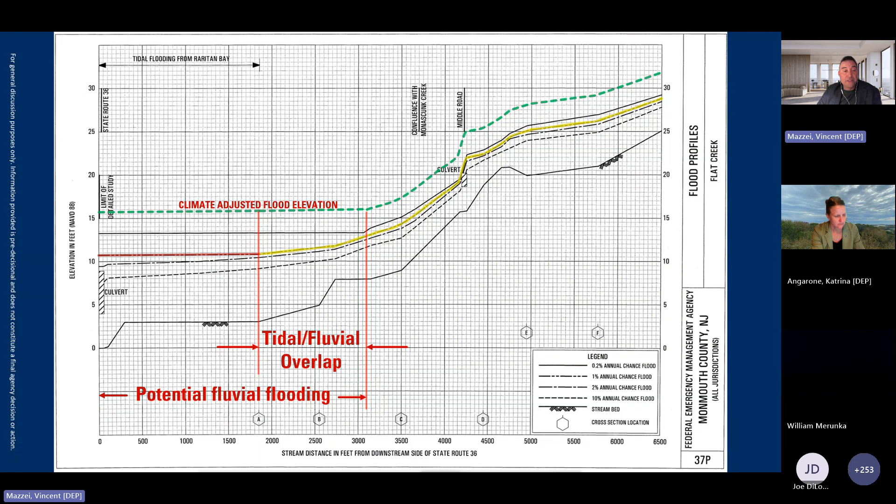This is an important point, because in that area, net fill and dry access still apply. In fact, you could have potential fluvial flooding even further downstream, because you can have riverine stormwater-driven flooding that could cause issues, and loss of flood storage might be a problem in those areas, or dry access might be a problem, even though it's subsumed in this larger tidal floodplain.

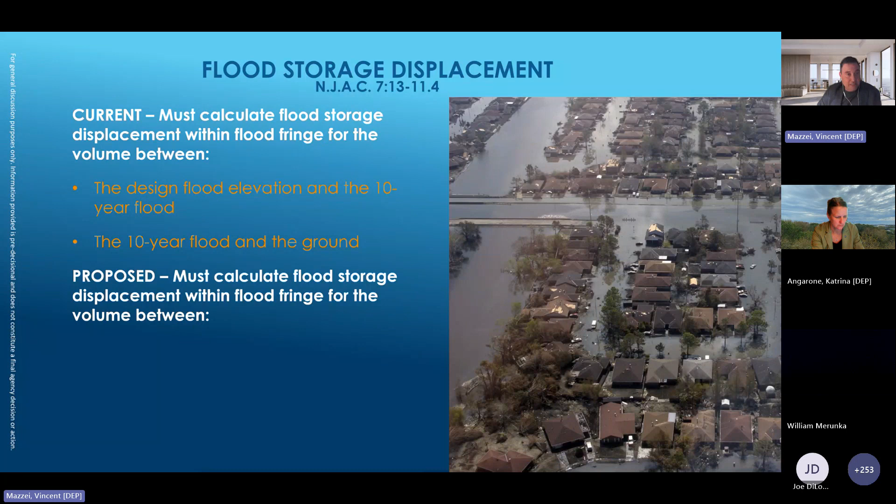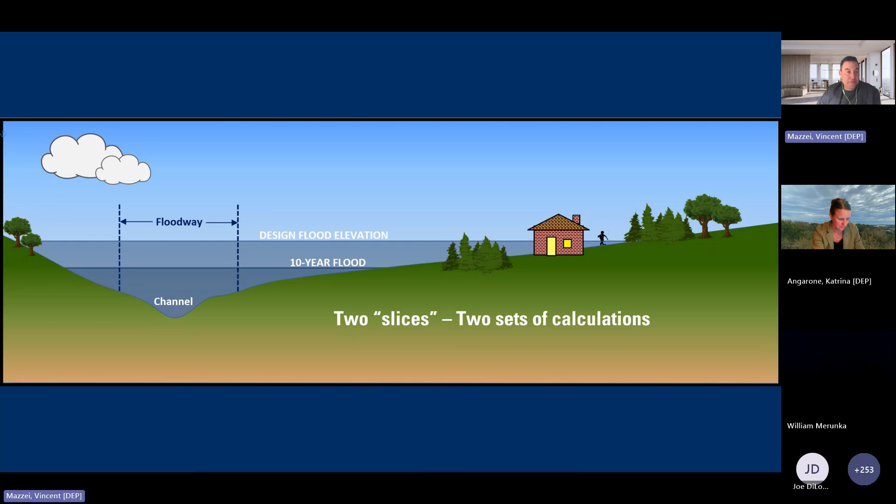So flood storage displacement - today you have to calculate it for 2 slices of the floodplain, which I'll show you. In the proposed conditions, you have to do 3 slices. If here is your fluvial floodplain and you have 2 slices, you have to show us that you're meeting 0% net fill for the area under the 10-year flood, and then the area between the 10-year flood and the design flood elevation.

Now there's going to be 3 slices: between the ground and the 10, the 10 and the 100, and the 100 and the climate adjusted flood. Why this is relevant to this conversation is that you could have situations where one of these floods is tidally influenced and others aren't.

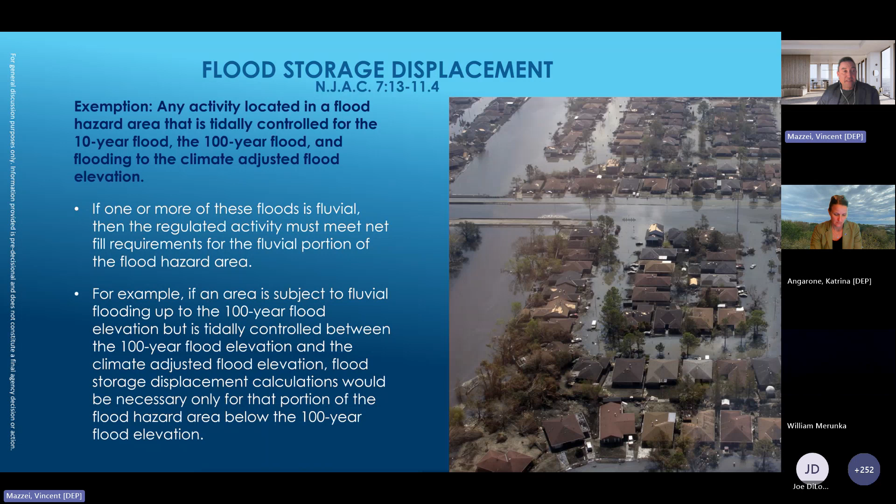So if you look in the flood hazard rules in section 11.4, there's language we're adding that addresses this: if one of those slices is tidal, you don't deal with net fill in that slice, but if the slice is fluvial, then you do deal with it. So it's going to be interesting to calculate that in that area.

I'm going to just go right to the end and have whatever time's left for questions. I'm going to talk a little bit about roadways. I have about 6 slides left.

Dry access is the requirement in the rules that in certain circumstances, whether you're building certain buildings or certain roadways that you're building or improving, you need to build them so that you can get to them or from them during a flood. So people should have the ability to come and go during a flood for certain types of buildings, and emergency responders can get to the building.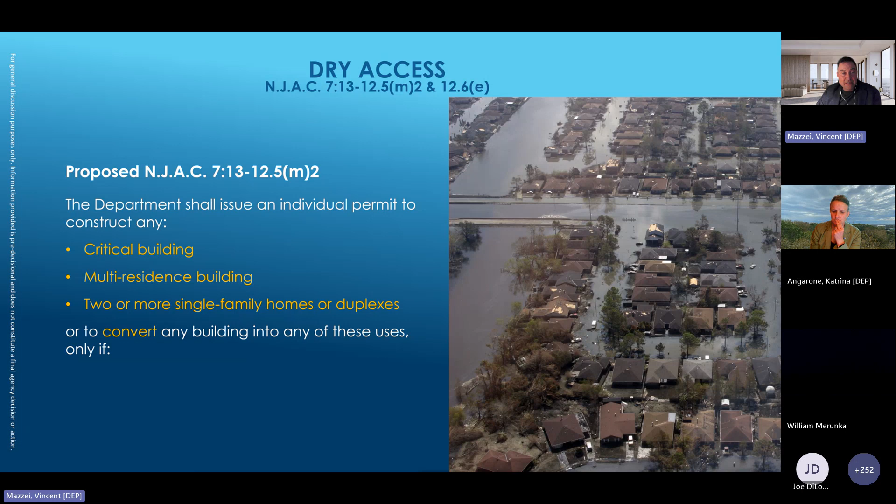So if it's a critical building like a hospital or school, a multi-residence building, or a residential subdivision of 2 or more homes, or if you're converting any buildings into any of these uses, then dry access applies. You have to have a roadway that's at least 1 foot above this climate adjusted flood elevation getting to it. And there are some off-ramps though.

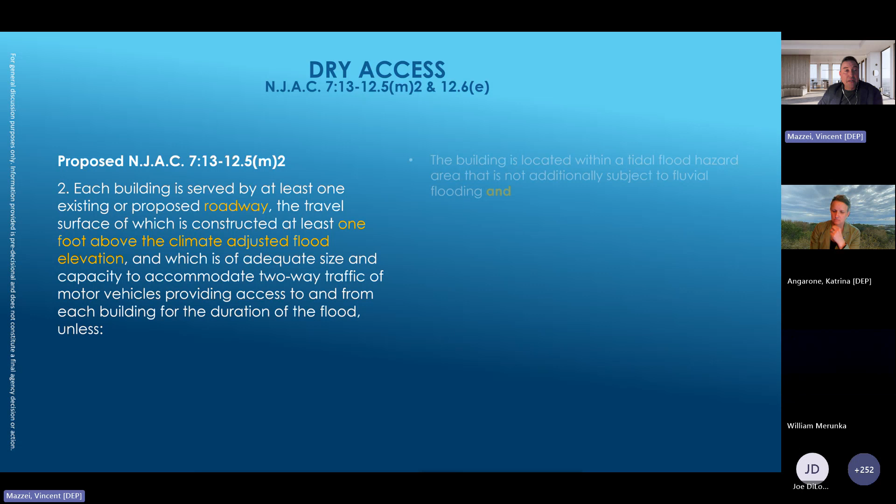If you're in a tidal flood hazard area that doesn't have additional fluvial flooding, and you demonstrate it's not feasible to raise the road, and you put a deed notice on the property stating the maximum amount of flooding that will cause a problem, so people are well informed, then you don't have to meet the standard. This is predicated a lot on the fact that the dynamics in tidal flooding are very different than fluvial - fluvial flooding, you can have flash flooding.

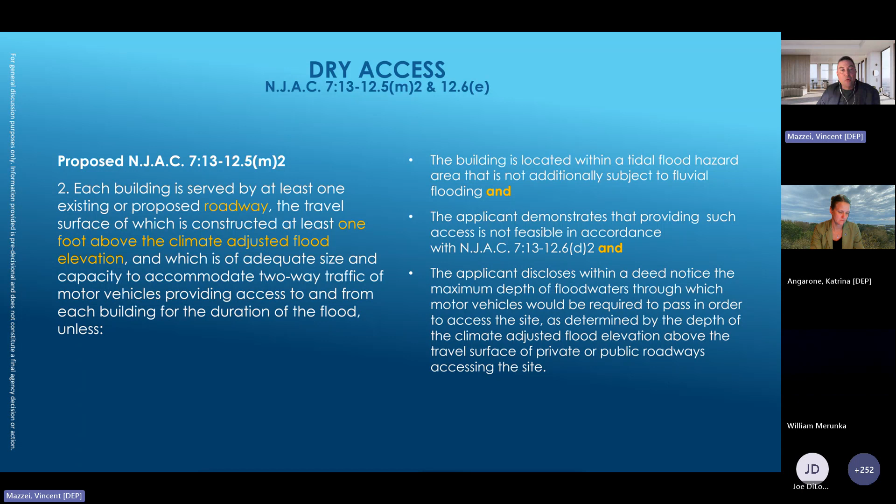It's hard to predict when it's going to happen. You could have a storm just come up and have a flood like we saw with the remnants of Tropical Storm Ida. But a tidal flood, you have some advance warning. You know when the hurricane is likely to hit. You have evacuation plans. You know what areas of your community are vulnerable. And so having that dry access in those areas is not quite as critical as it is in fluvial areas.

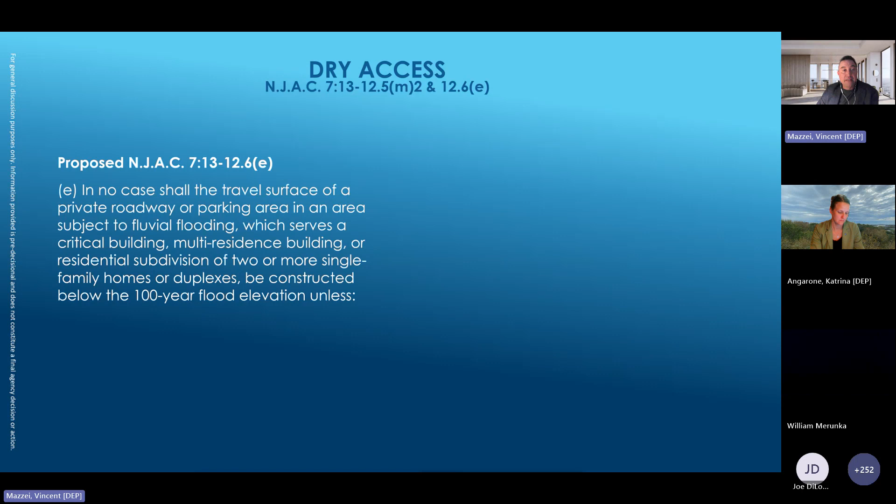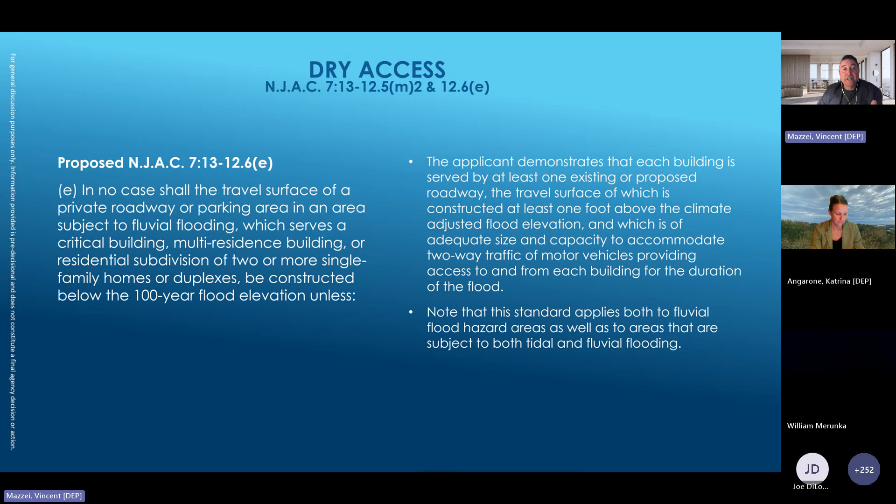The flip side of it is, what if you're building a road? This says in no case shall the travel surface of a road or parking area that serves those kinds of buildings be below the 100-year unless you demonstrate that there's already a road. So let's say you have a hospital and you're rebuilding the road to the hospital or putting a new road to the hospital. You have to show that it's elevated, or that you don't need to elevate it because there's already a road. And this standard applies both to fluvial flood hazard areas as well as areas that are both tidal and fluvial, so that overlap area.

And then the last few slides just dealing with roadways, because this is a concern. People have said, well, how could we possibly raise our roadways 5 feet, 8 feet, 10 feet like you're suggesting? And we know that that's not practicable in some cases, and maybe in a lot of cases. That doesn't mean that you can't raise it at all. That doesn't mean that you can't make it a little bit safer. And so we've seen time and time again where bridges are being replaced and there's an opportunity to raise up the road surface a couple feet, so to make the road less likely to be inundated and more resilient and more able to resist the flooding.

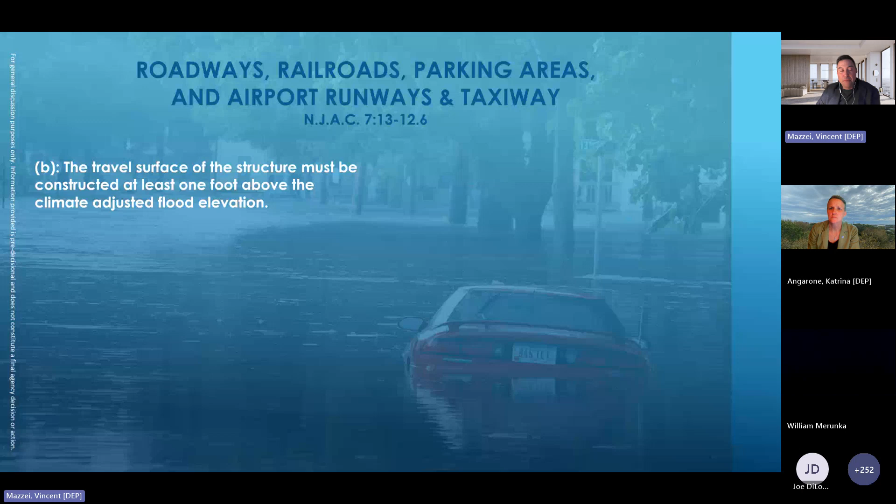So the starting point for this and almost everything in the rule is that the structure has to be constructed 1 foot above the climate adjusted flood elevation. So the travel surface of the road or parking lot or the airport runway or taxiway or road has to be one foot above. Two exceptions.

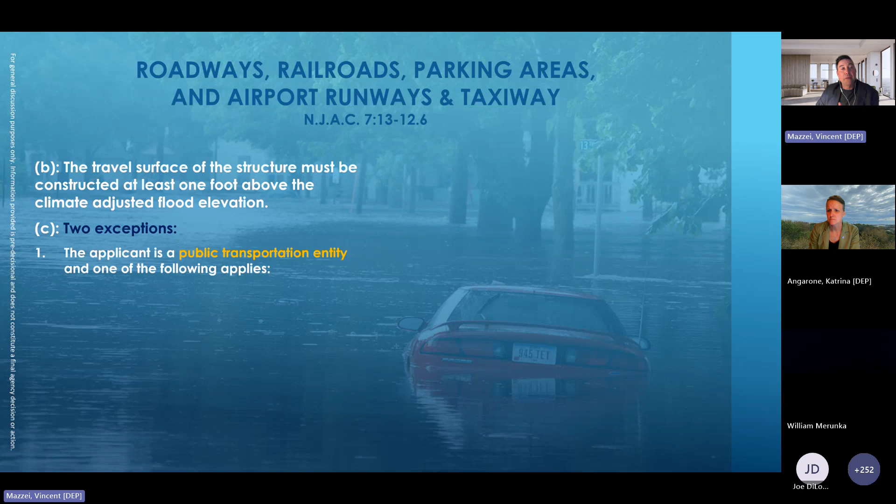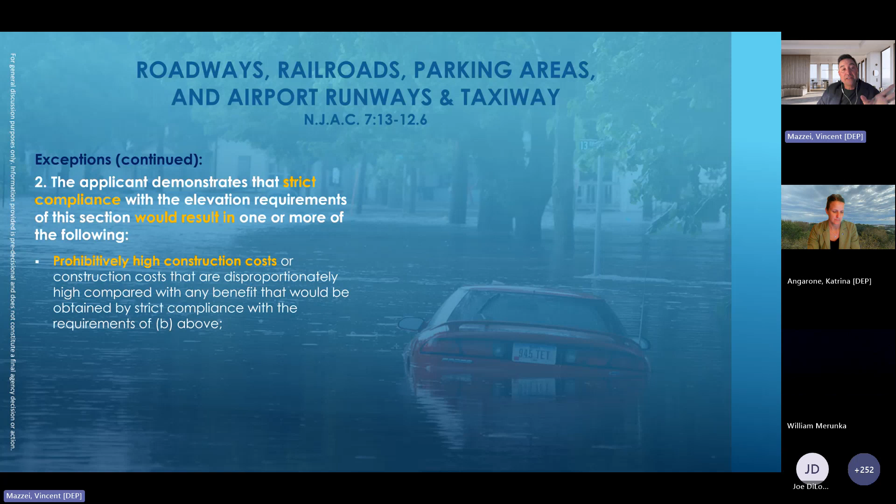One is that if you're a public transportation entity and you're either doing just drainage improvements or safety, state of good repair improvements like before, or if you've been locked in with a preferred alternative on a certain date, which you'd have to demonstrate to us, then that gives you the ability to have flexibility. But then you also have to demonstrate that there would be prohibitively high construction costs to raising the road, excessive volumes of fill, design that doesn't meet transportation safety geometric design or other standards, unavoidable adverse impacts to the environment, and so on, or design that unavoidably exacerbates flooding.

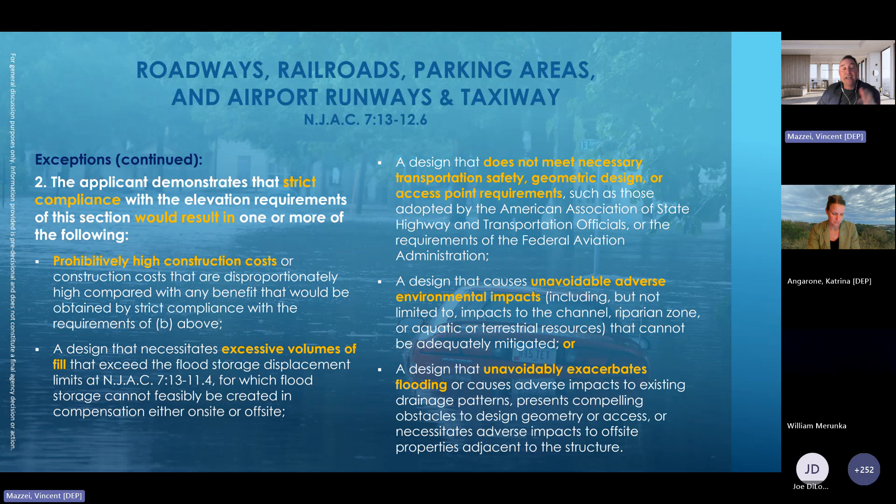So the idea is that if there's a means of adding value and a way to add value, then we want to seek that. And if there isn't, then we move on to the next.

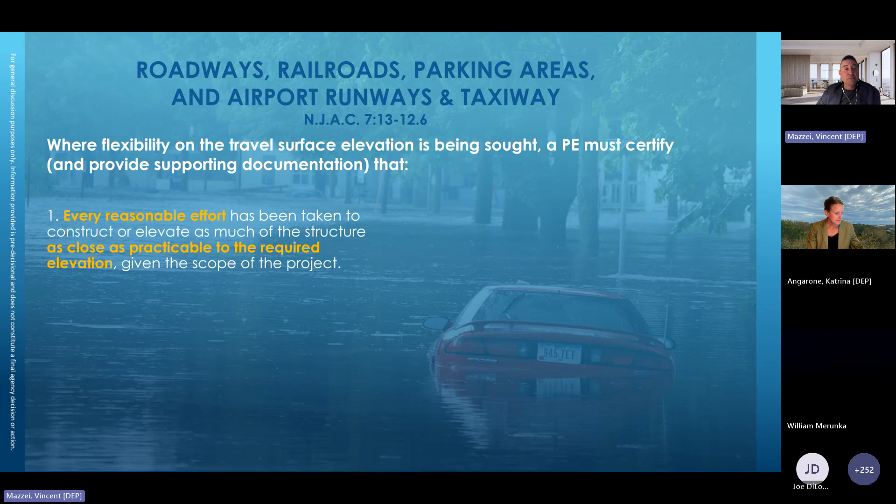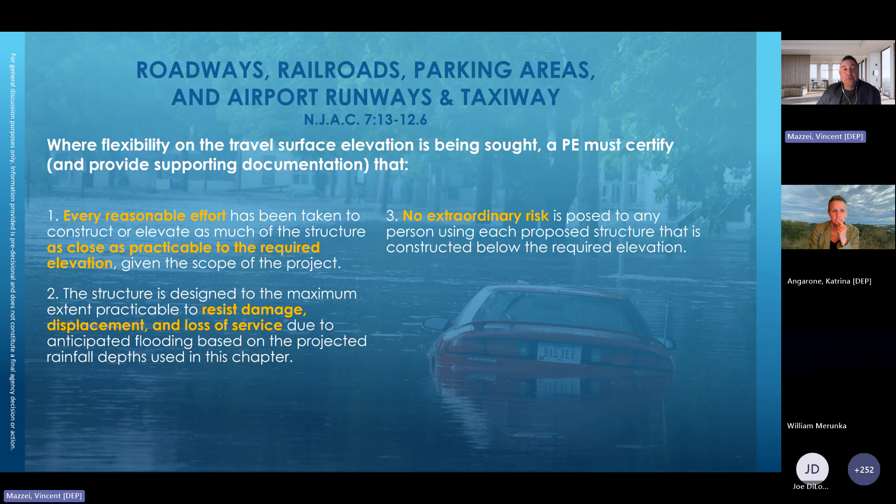And then again, just to finish this topic, any kind of flexibility for travel surfaces, if that's being sought, then a PE has to certify and provide supporting documentation that everything reasonable is done to get as close to the target elevation as possible, that the structure is designed to be there after the flood, be able to resist damage and displacement and loss of service, that there's no extraordinary risk posed to people, and the rules explain what that means. And the project has to meet one of the cases that we identified before.